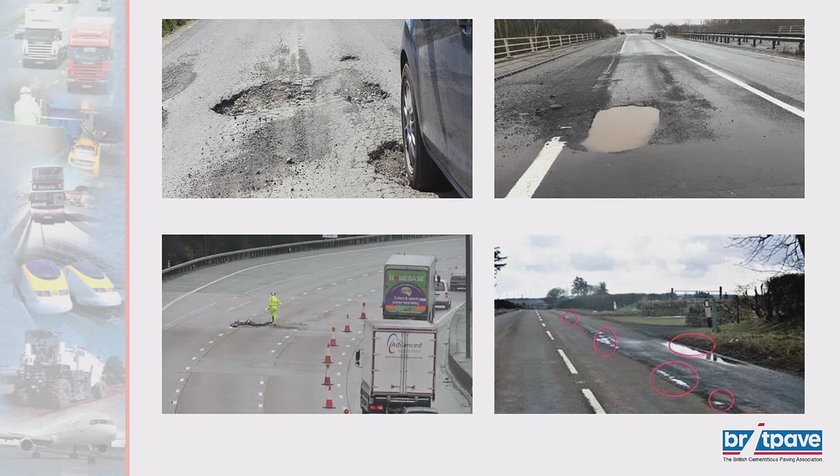Unfortunately, so often is the case - and obviously these pictures aren't related to the first set, or to anybody that's constructed roads who might be here today - this is an all too familiar picture of what the public get, and what we get, when we're driving around on our roads.

So where is the failure? Could it be poor workmanship? Potentially, maybe - cost could be a driver of that. Could it be the quality of the pavement materials? There's a chance of that, but standards are quite high now, so there's a bit of a chance, but possibly not. Damage to the surface - it could, in some instances there is damage to the surface, maybe from accidents or something's been dropped on it, or other factors. But taking those into consideration, we could be forgiven, as it says there, for thinking that all problems start from the top. Very appropriate nowadays.

We think that those things happen, but there is one place that the failure is most likely to start. I'm reminded of the chorus of a very well-known song as to where it might be - I wonder if anyone can think what the song could be.

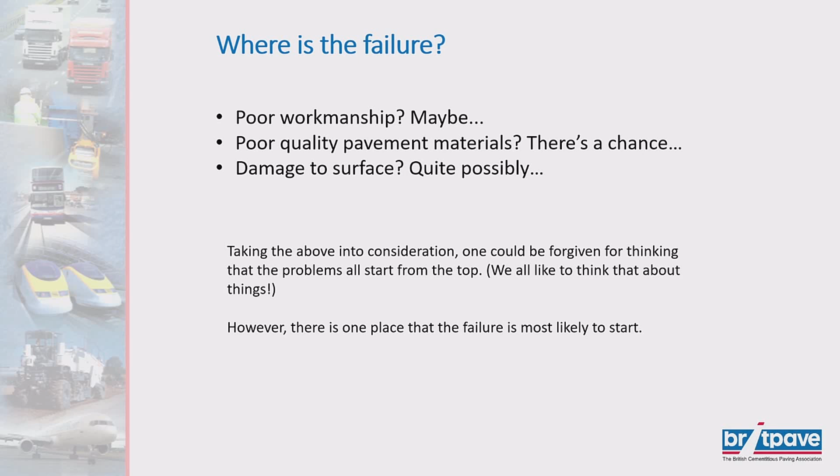No? Okay, here goes - it's all about the bass, no treble. It's all about the bass, no treble. It's all about bass. You're going to carry on? No, all right, okay. Anyway, we talked a lot about this, and he said he was going to interrupt me a little bit earlier, so I apologise for that. At least you'll remember now where we're talking about.

So the problem is likely to be in the ground. So what's the solution? But why is the problem in the ground? Let's think about that first. So why do our subgrades fail? We have some very plastic soils here in the UK. We've had some really wet weather, and now, obviously, what's happened over the summer, we have some very dry weather. All of these things can lead to changes in the subgrade, which can lead to problems further up through the pavement layers and up to the surface.

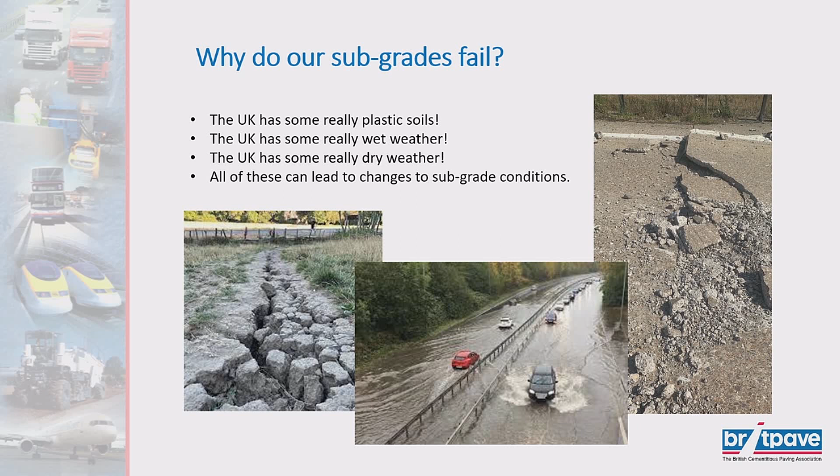So what is the solution? Soil treatment is part of the solution. Well, you could dig it all out - dig it down to a very low depth and replace it with stone. But soil treatment is definitely part of the solution, improving your subgrades so that what you're putting on top of it is going to stay where it's supposed to be, and it's going to survive.

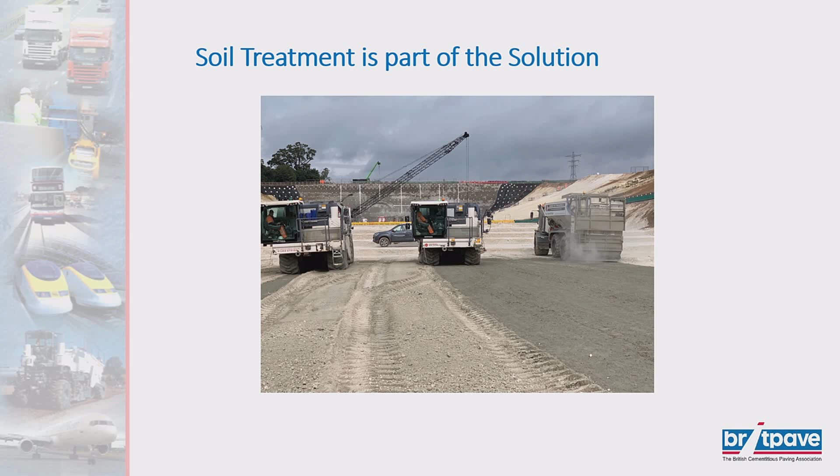But the history of soil stabilisation is definitely not new - it really isn't a new process. If you go back to 6,500 BC, 3,000 BC with the Egyptians... and again, the question - what have the Romans ever done for us? Well, they used lime in road construction. Ermine Street, Watling Street - there's still evidence today of lime stabilisation being used when the Romans came over here and realised that we do have those wet plastic soils, and it's very difficult to get anywhere.

So I'm going to hand over now to Steve for a bit, who's going to start talking some technical stuff to you, and he's going to not sing, and he's not going to dance, and he's not going to do anything like that. So, he didn't tell me he was going to. No promises on that front, but unlikely.

Just a little bit of theory. I know some of you may have heard this before, but I took a look at the theory of soil treatment, and for all of the cement producers in the room, I'm actually going to talk a little bit about lime as well, because it has some very great added benefits. Next.

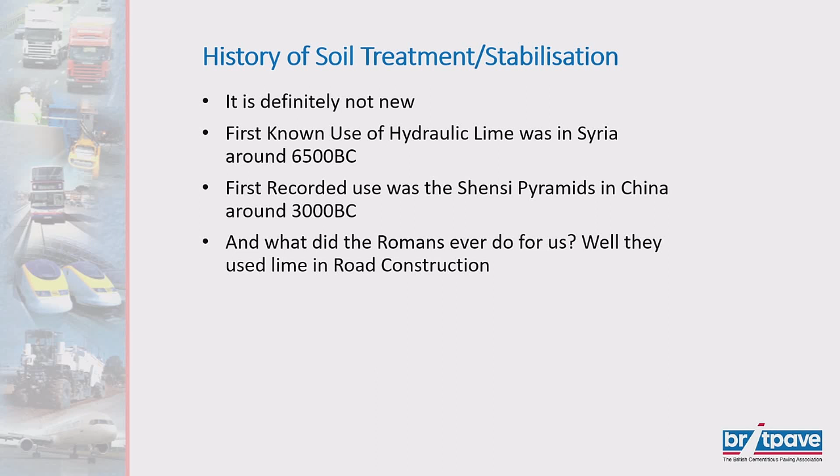This was referred to earlier in terms of BSEN 16907 Part 4. I was part of the drafting committee on this, which is the European standard for treatment of soil with binders. And there's a difference between soil improvement and soil stabilisation.

Soil improvement is an operation which modifies the physical properties of material, such as water content, plasticity, water and frost susceptibility, by the addition of a binder. The only difference between soil modification and soil stabilisation is that with stabilisation you have guaranteed the material changes those characteristics in a way that renders it stable, particularly against water and frost. Soil modification can be a short-term or medium change, whereas stabilisation is a locked-in change to the properties of that soil.

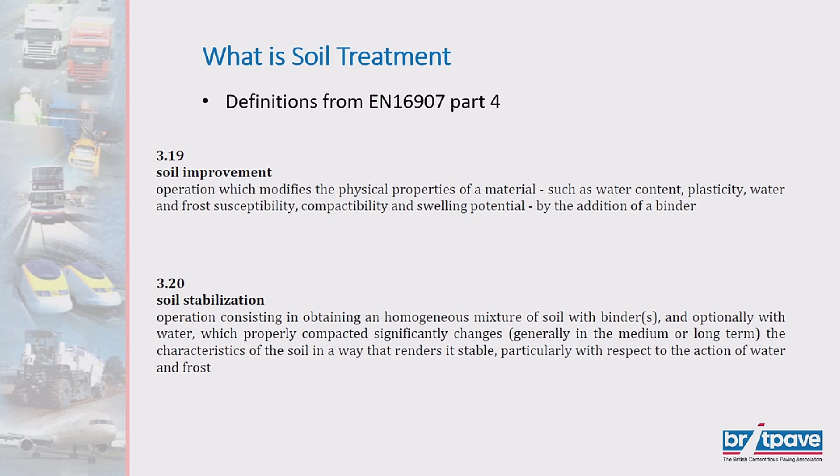What does lime do when you add it to soil? It's not just drying it out. A lot of people say, we've got a wet site, can you come and add some lime to dry it out? It's seen in a lot of cases as a short-term fix, soil modification and treatment, but no.

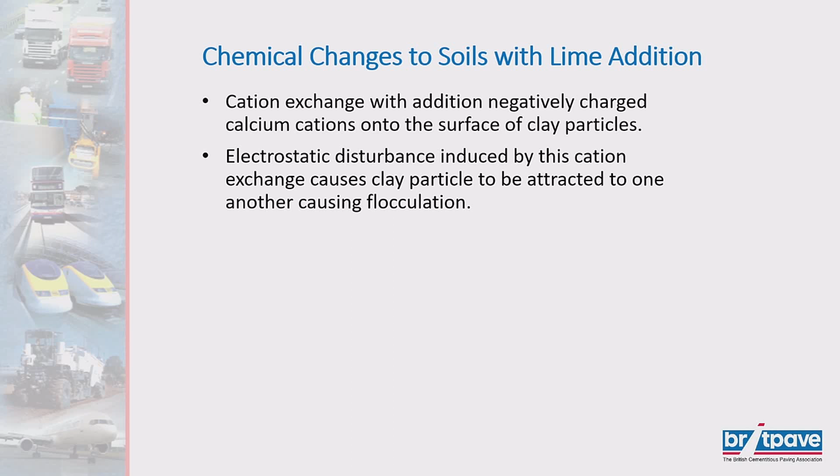There's a cation exchange with the addition of negatively charged calcium cations onto the surface of the clay particles. That causes electrostatic disturbance, which means clay particles are now attracted to each other, causing the soil to flocculate. Rather than a science lesson, effectively you're going from a nice mouldable clay at the bottom, which is nice and wet, to one where that exchange causes a flocculated clay.

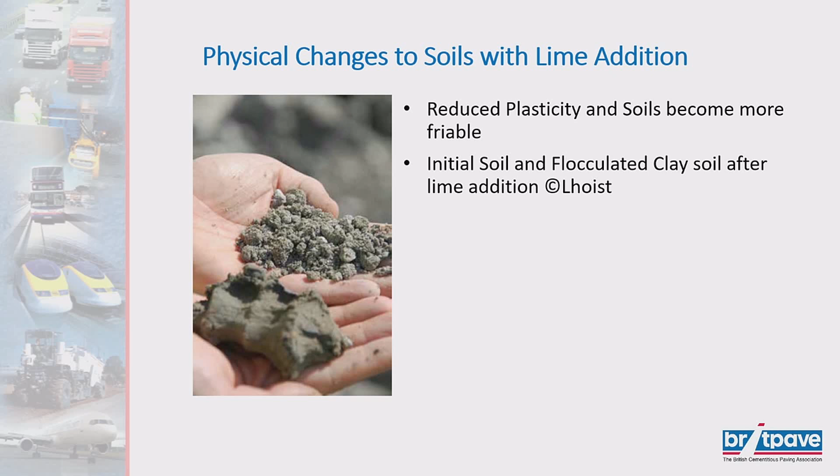It acts slightly more granular in nature. Part of that physical change with the lime is that if you were to add cement or another hydraulic binder to that material beforehand, it's very difficult for it to mix in. But once you've flocculated that material, it is then very readily acceptable to cements and other binders to get a very high strength addition. Lime doesn't purely just dry the soil out.

Geotechnically, lime changes the soil. It increases the plastic limit of the soil. So you may have a soil, the same soil, sitting here at the start - this is taken from Earthworks, a guide from Paul Nowak and Peter Gilbert, the ICE update - your natural soil sits in the plastic state.

So your soil is wet of plastic, you add lime to the soil, the plastic limit increases. The same soil after the addition of lime is then in the solid state, much more resistant to change, easier to compact, easier to handle, easier to traffic, and gives you a better product.

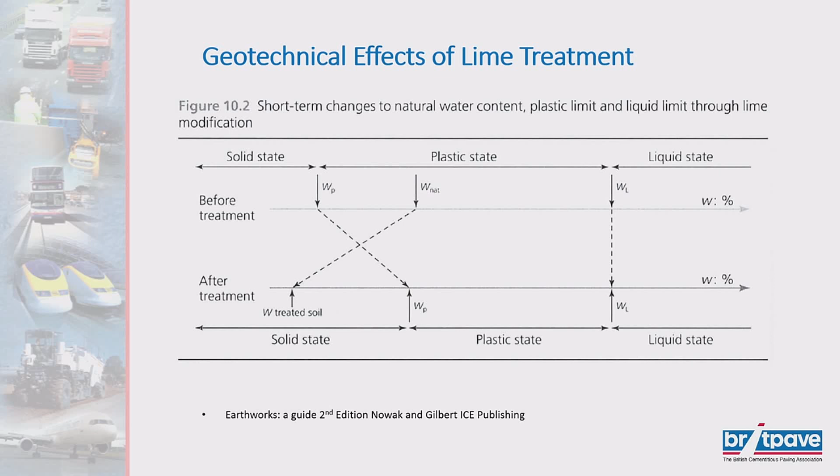The addition of lime also reduces your maximum dry density of the soil, making it easier to compact, and increases your optimum moisture content. So your soil is more likely to be usable - it increases the ability to use that material once it's been limed, more likely to accept it within an embankment.

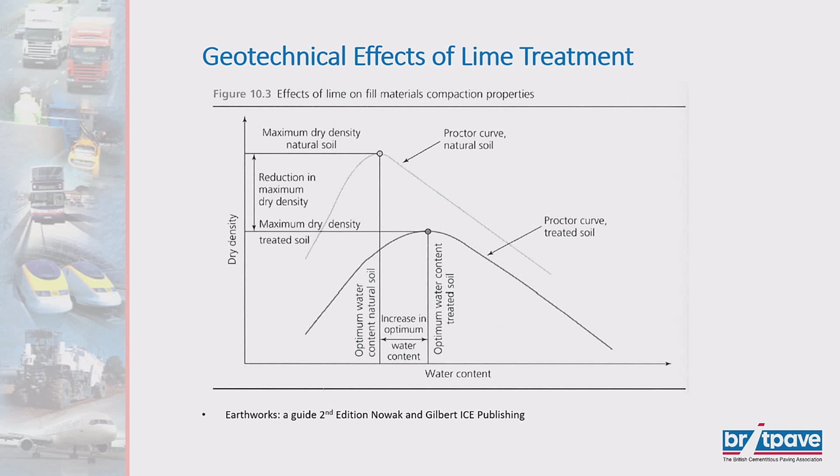Within the use of soil treatment, working back up, we do have some very nice standards. This is split between the standardisation bodies - looking at what's within the BSI, we have the top BSI 16907 Part 4 referred to earlier and referenced from National Highways. Following on from the National Highways talk earlier, the 5-year review of 16907 Part 4 kicks off in December 2023, so Paul, that will line up with the session.

One thing that has been talked about from the member countries is looking at increasing the range of binders within 16907 Part 4 - so that's being looked at in terms of slightly widening the scope. At the moment there are purely standardised binders within it, and which standardised binders are included hasn't been voted on, but the chances are it will be reviewed following 2023.

Within the pavement, 14227, various parts, refer to hydraulically bound mixtures, which are in your pavement foundations. 9227, relatively new, covers hydraulically bound materials - the production and installation in the pavement - a guide of how you produce and install those materials.

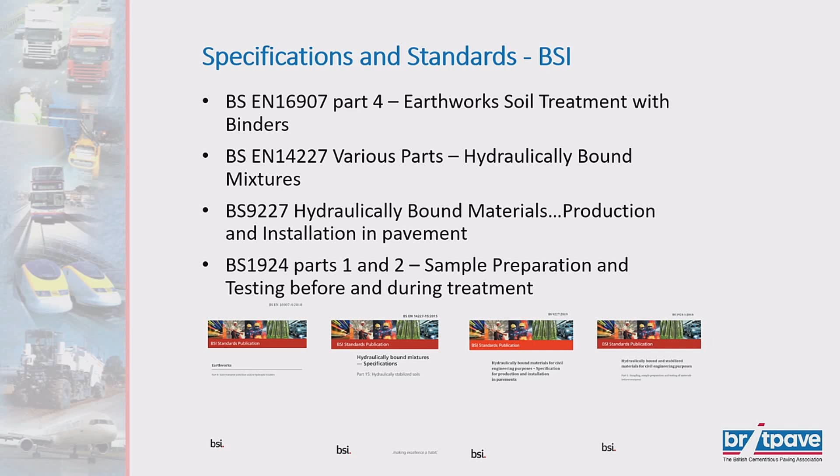And backing that up is testing. You always say you can build the greatest job in the world, but unless you can prove it, it's worth nothing. So 1924 Parts 1 and 2 talk about the sample preparation before and during treatment, to prove that you're doing your soil treatment works properly. We have here DOT spec, as referred to earlier.

CD225, the design of pavement foundations, includes 4 stabilised subbases within it. Series 600 earthworks, although it's under review at the moment, is limited to capping and has no earthworks treatment included within it. Within reference documents, Series 800 has the unbound cement and hydraulically bound mixture within it. What's being addressed, I believe, won't be Series 600, it's going to be CC201, which will hopefully look at soil treatment within general earthworks.

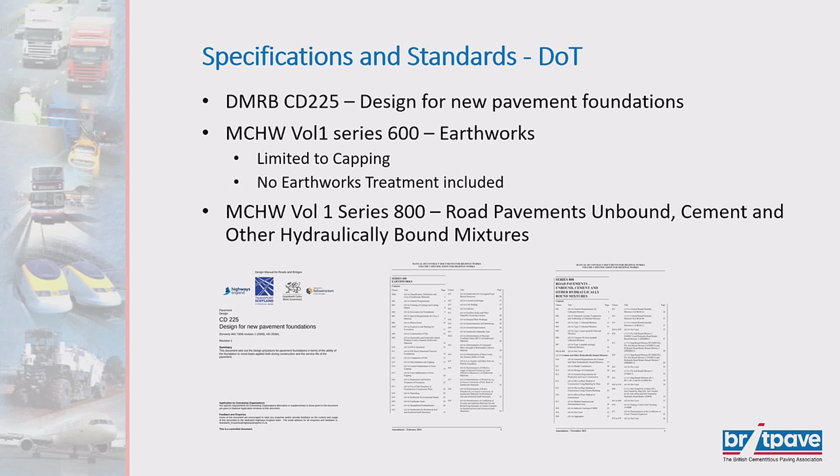And Al, give me a breather. There you go. Yeah, obviously we can't move on to the other part of the presentation without actually putting the BritPave hat on again.

Just to let you know, since 2004, when we formed the Soil Stabilisation Task Group, over the years we have worked alongside, as they were, Highways Agency, then Highways England, now National Highways, along with other bodies, to produce a number of guidance documents covering soil stabilisation in its many forms, improvements in sulphate-bearing soils, hard standings, roads, and now the definitive guide to soil stabilisation, which we worked alongside National Highways quite closely to produce, a document that was going to offer something alongside the HA 7407, which is now obviously not going to be updated and sort of disappearing into the distance.

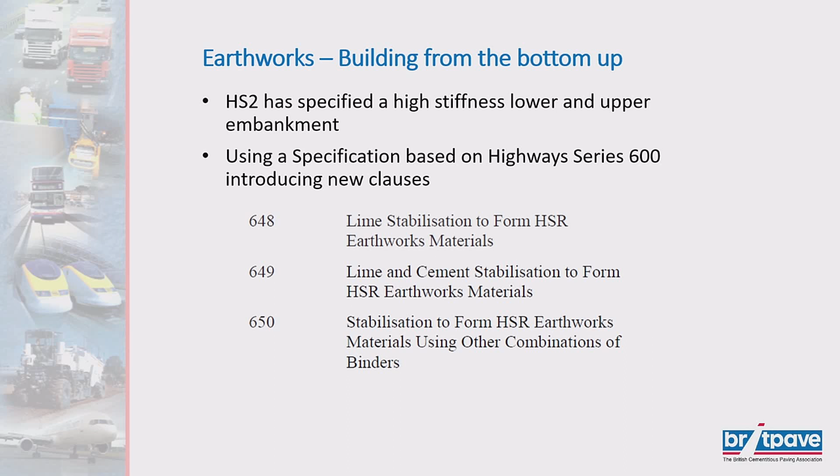Having spoken with some of the lead designers, they have actually put a very high specification on the earthworks. Because, as Al said, unless you start from the base up, anything you build, you wind up putting, as we would call it, a very nice skin on a rice pudding, which whatever you do to it, is going to crack. So what they have done on HS2 is introduce 3 additional clauses based on the Series 600: 648, 649 and 650, which is using the stabilisation of lime or lime and cement to form the high-speed rail earthworks materials, and also 650 using other combinations of binders. If you can prove it works, it hasn't ruled out other binders, so it's not purely limited to straight lime and cement.

It's one of the hardest specifications for earthworks for infrastructure in the UK. We have come across similar specifications under high bay warehouses for the likes of Tesco's, where they definitely don't want it to move. But in terms of infrastructure, it's one of the highest specifications: for lower embankment fill, you have to achieve greater than 95% MDD with less than 5% air voids on a 4.5k rammer, and the upper embankment fill, which is the top 5 metres of the fill - it's not just 1 or 2 metres on top - requires greater than 98% density on a 4.5k rammer, below 5% air voids, and an EV2 stiffness of greater than 60 MPa.

It's one of the toughest specs we've achieved, and Steve, if you don't mind saying, it's actually proved quite tricky to achieve that without significant additions of water and other materials in some of the materials we have within the UK. But once it's down and complete, from our experience on C1, which is the contract at Maple Cross, once it's in and to spec - to not the HS2 spec, I need to say the HA spec, the HS2 spec - it's bulletproof. It's not going anywhere. And so then work through.

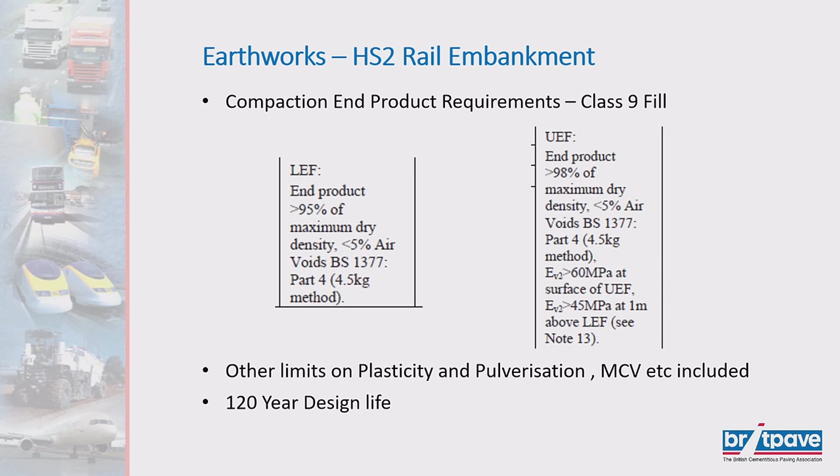But coming back to our 100-year road, recent examples of using stabilised soils on highways is within the North Norwich Distributor Road, where Class 2 and 3 foundation was installed. Steve was heavily involved with that as well. Working with Norwich Council, interesting to compare to the Belgian experience there, the decision was made, rather than going for a thinner, high-strength layer, we actually went for a thicker, slightly lower strength material, and that's been in now 4 or 5 years with no issues. So in terms of treating the natural soils.

Newark to Widmerpool, similar timescale, a HBM layer using imported planings and some site-won materials, and a guided busway was a full Class 3 foundation put in to remove any imported stone.

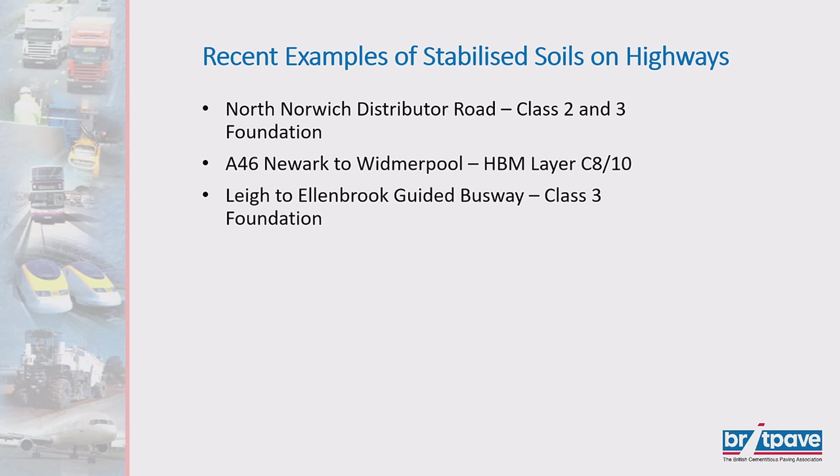So stabilised soils within highways, some recent examples, but from my view, working on the earthworks upwards, it definitely works. Just going to have a look here in terms of a treated soil, in terms of long-term benefits.

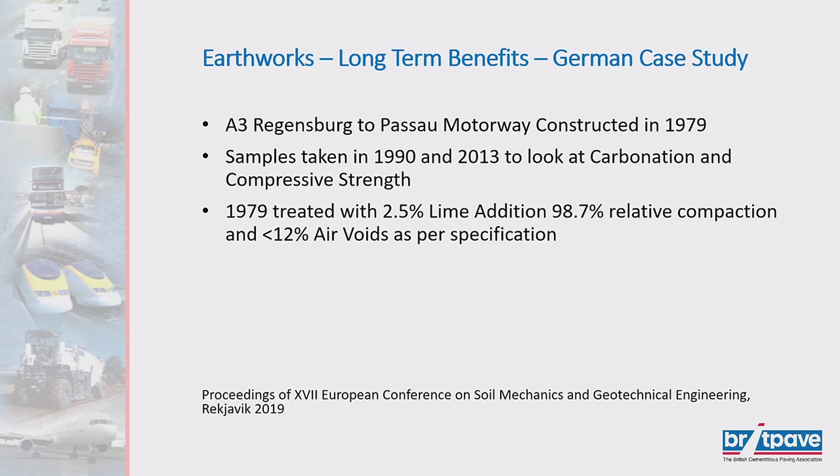This is an example from a European conference from 2019 of a road built in Germany in 1979. They took samples in 1990 and 2013 to look at carbonation, so then compressive strength. It was initially treated to the German specification, which was 2.5% lime addition, 98.7% relative compaction - I think they had to achieve 98, and below 12% air voids. A lot of more granular soils in Germany tend to have a higher air voids allowance than we would normally allow within the UK.

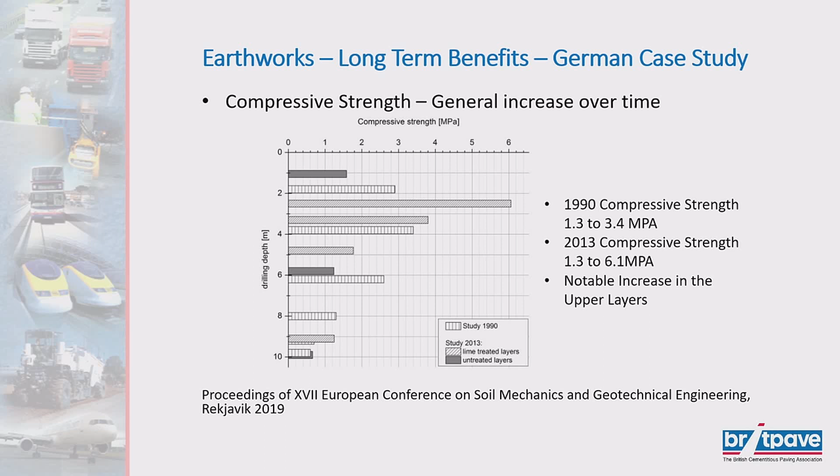Very simply, it's treated with lime. In 1990, they were getting average compressive strengths of 1.3 to 3.4 MPa. That was going up in some places to 6.1 by 2013. So it is still increasing in strength over time with the addition of binders, with a notable increase in the upper layers. I'm going to talk a little bit here about carbonation.

Soil stabilisation can get a bit of a bad reputation in terms of the amount of carbon embedded into it. But carbonation rate is the percentage of CO2 that's captured during the application compared to the CO2 created in the manufacturing process. What this German study found is that over the period of time, there's 40% carbonation - so 40% of the CO2 produced in the manufacture has been captured during the life of that product.

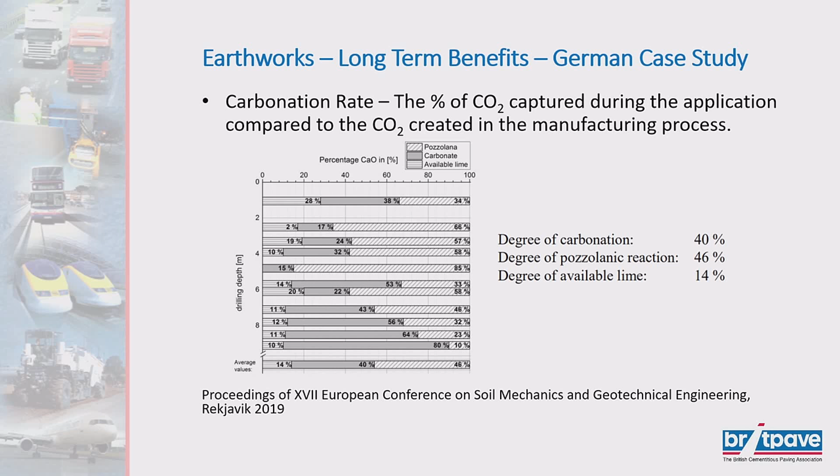So the use of lime or cement or other materials within it doesn't automatically mean the carbon is just there - it's actually going to get some of that carbon back.

One of the interesting things from comparing within national highways was a thought of taking the 2020 carbon usage - not a lot of stabilised soils in embankments were used in 2020. But a stabilised soil can give a longer duration in terms of life, so you may use more carbon compared to 2020. If you were to design an embankment with a lot of lime and cement in it, your carbon will probably increase from that baseline, but I would definitely state your design life will increase. So in terms of whole life costing, I would suggest it probably comes down.

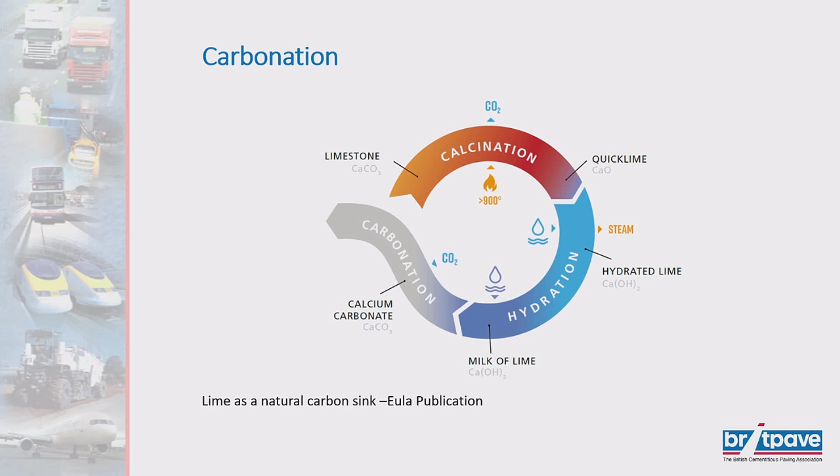On this basis, soil stabilisation has a carbonation rate of 35 to 40% - it puts it back in. Going forward, others will talk about this later - binder producers, both lime and cement, are working towards carbon zero in terms of production of that material. So lime itself is a natural carbon sink as it reacts - soil stabilisation carbonation at 35%. Over time, the use of lime and other materials will actually be carbon negative because of the nature of the process. So if they can produce binders with zero carbon, with carbonation it becomes a carbon negative product in terms of using soil stabilisation.

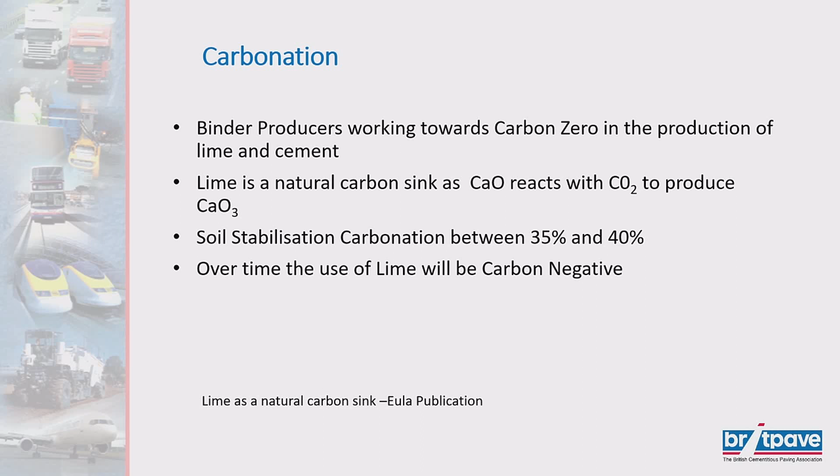Finally, we've mentioned climate change - we are facing more flooding, higher temperatures, and so on. A stabilised soil is more resistant to water erosion from flooding and can be used for water retaining structures. ICOLD, the International Commission on Large Dams, about 4 or 5 years ago started to accept that you can build cohesive dams with lime addition for longer term erosion resistance. A stabilised soil is more resistant to frost damage, and more resistant to drought conditions. A stabilised soil is durable, so we think in the long term, stabilised soil and soil treatment for your earthworks and lower pavement layers will increase the design life and construction life.